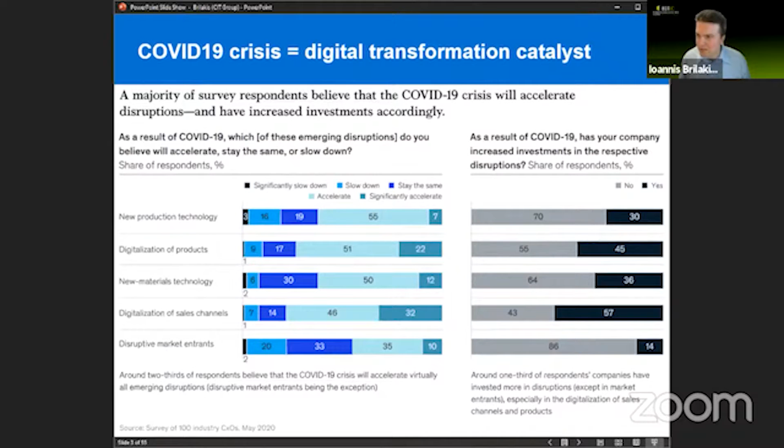On that, digital twins, in my view, are at the core of this digital transformation journey. And I think you've already seen from the presentations before us about what the value is. There's clearly quite a lot of potential value across all KPIs: cost, time, quality, safety, sustainability, resilience, and so on.

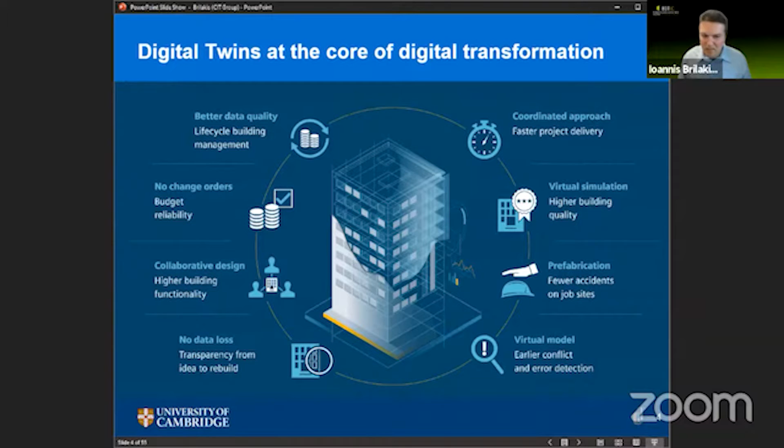But then the key question that comes to my mind is, if digital twins are so great, why aren't they as ubiquitous as physical twins? Why don't we have them everywhere? My tentative answer is these 4 main bullets.

The first one is, we know the physical twin as a product, but we're still discovering the digital twin as a product. And we need a lot more R&D to get to the point where we would have a similar degree of understanding of digital twins as we have of the physical assets, the bridges, the buildings, the roads, and so on.

The second aspect is that, likewise, we know and we have been automating for decades now physical twin processes, design processes, construction, maintenance, and operation processes of the physical twin. But we haven't done that for the digital twin. Ways to design the digital twin, construct the digital twin, the twinning process, maintaining the digital twin, and so on.

That is primarily mostly manual, therefore perceived as very expensive. Therefore, the value to cost, the benefit to cost relationship is just not there in place yet to allow us to penetrate the market quite fast. So again, a very big need for R&D to create more AI and automation to help the twinning process.

The next 2 are more industry related. One has to do with the fact that owners have quite a lot of experience of the value of physical twins, but not of digital twins. And that makes there a very big need for real use cases that can help push for much more rapid market penetration.

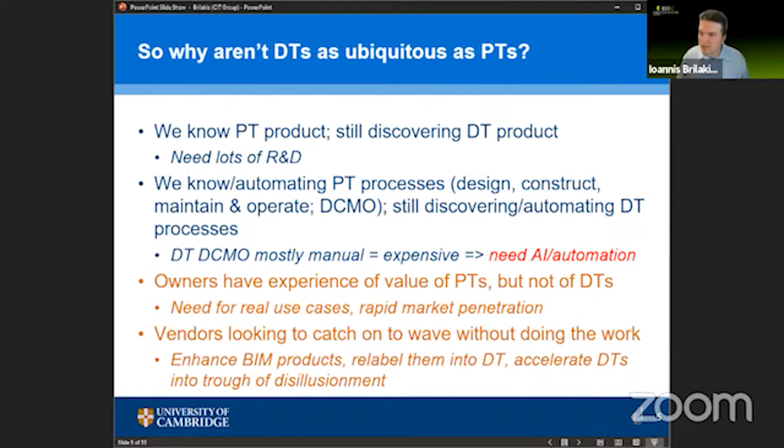So how do we solve this problem? Well, on that space, at least at Cambridge and also with colleagues like Rafael Sacks and others, we're trying to do as much as we can on those first 2 bullets to understand the product and understand the processes necessary so that we can service the market better.

On the first bit, on understanding the product, a year ago, we published a paper with Rafael Sacks where this figure comes from, although this one is slightly adapted since last year, that sort of gives you an overview of the relationship between digital and physical twins.

We like to use here the paradigm of a person standing in front of a lake, the person being the physical twin, and then underneath him, his reflection on the lake is the digital twin. So you see the positive axis going up is the physical product and process, and the negative axis is the information volume.

And so starting from the beginning of time, you have your planning and your design phases from the moment of conception. On the physical end, you have all your design processes going on. And then on the digital end, you have the outcome, which is the design phase, product and process information gradually taking place. This is what we would call the design phase digital twin, or the fetal stage digital twin, before the building is actually born.

At the birth time, that's when prefabrication starts, which means construction processes start, prefabricated parts start happening. And on the other end of the spectrum, on the information end, you have construction phase product and process information starting to materialize. And then continuing on beyond the weaning phase, when the prefab parts leave the mothership and go to the actual site for installation, which is where you would actually grow your child physical twin into an adult.

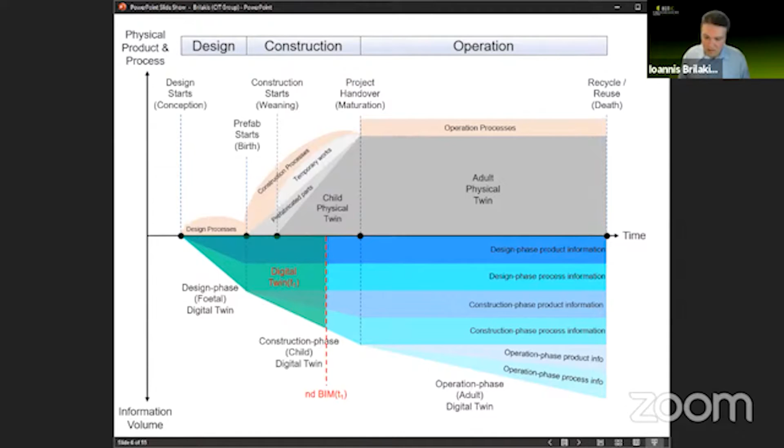Having said that, another important suggestion of my own is that I don't think digital twins should have any data in them. I cannot stress that in stronger terms: data have no place in a digital twin. Information does. Data is just raw data that may or may not have any information value.

It should be there to help us derive the level 1, most basic information level digital twin coming out of structured and unstructured data, typically held separately and deleted after use. Things like point clouds, things like images, none of that should be, in my view, in a model. Again, that would be a very basic digital twin.

As through the examples presented earlier, what we want to achieve is process that information, look at the information patterns, interpolate, and generate knowledge. Then beyond that, take those knowledge patterns, do some simulations, extrapolate, and as a consequence, generate insight. I think that's when we're going to get the best value out of digital twins.

And by the way, to do any of those things, that is actually a perfect use for AI. That's why the journey of digital twins is inseparable from the journey of AI. One helps the other quite well.

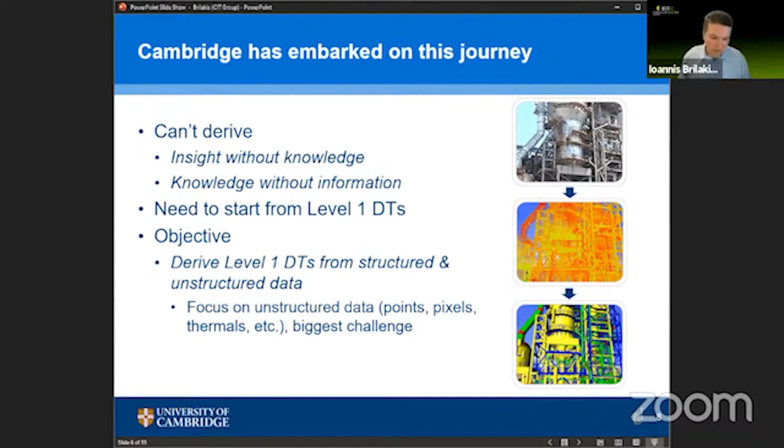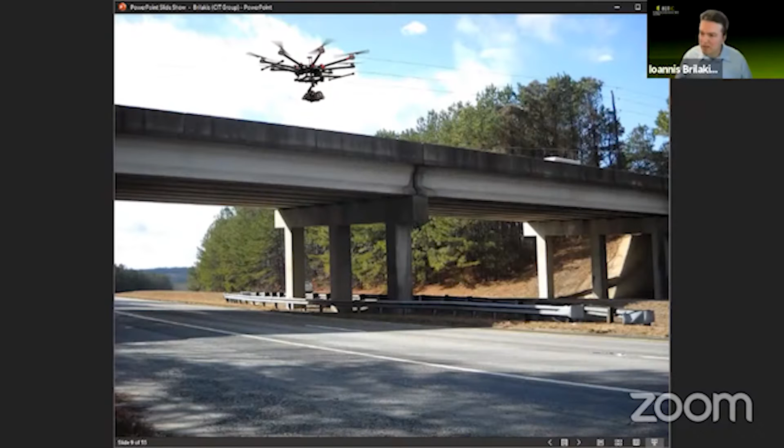On that space, we've done a lot of work using basic things like points and pixels on any asset, a bridge, a building, a road, and then from those points and pixels automatically generating the components, registering the textures on top, and then on those textures trying to derive information such as condition information and other things that might be of use later.

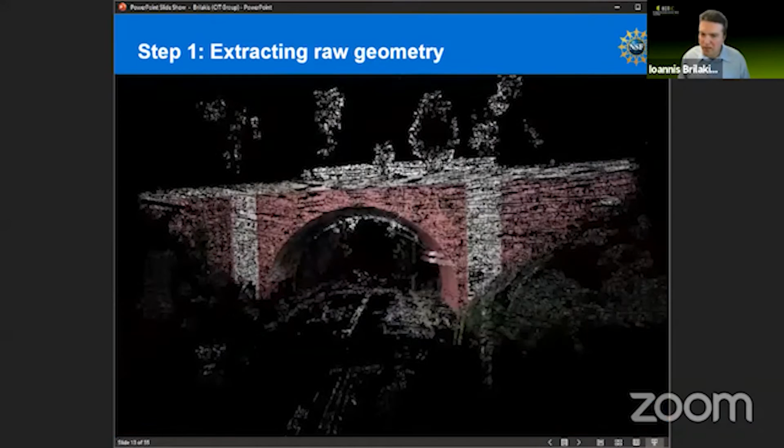To do that, we've come up with multiple methods, such as this one, mid-range mobile videogrammetry, allowing us to extract raw geometry from just a mobile phone from 25 meters away with a sub-centimeter spatial error, taking those point clouds, equalizing the densities, fixing the holes, producing generally good quality data sets that are meant for the machine's eyes to see.

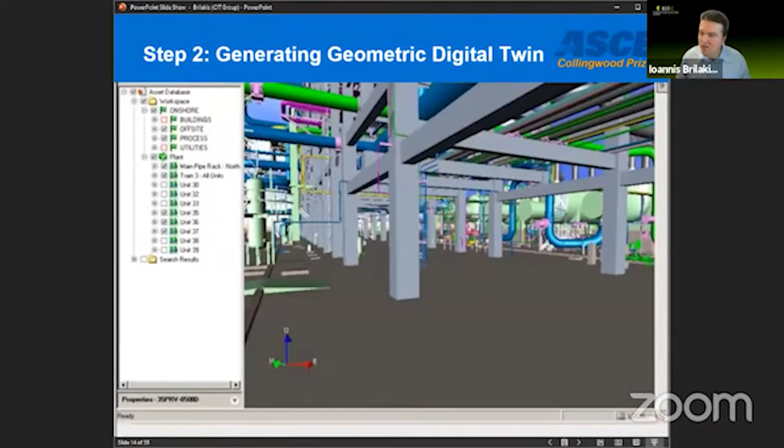I want to make that very clear: this is not for the human's eyes to see, because the main purpose is to process that into this level 1 information stage digital twin. That is a big problem on its own. There's been reports upon reports that talk about for every 1 day of laser scanning, people have to spend 10 days modeling.

That we are working with point clouds with well over 30 billion points in many cases. And most importantly, it's a very boring job. Imagine someone tried to model pipe after pipe, valve after valve. I mean, the example I have here on the right, this reactor building, 40 billion points. It took 10 people 6 months to make one model. I mean, this is clearly a case that screams for automation.

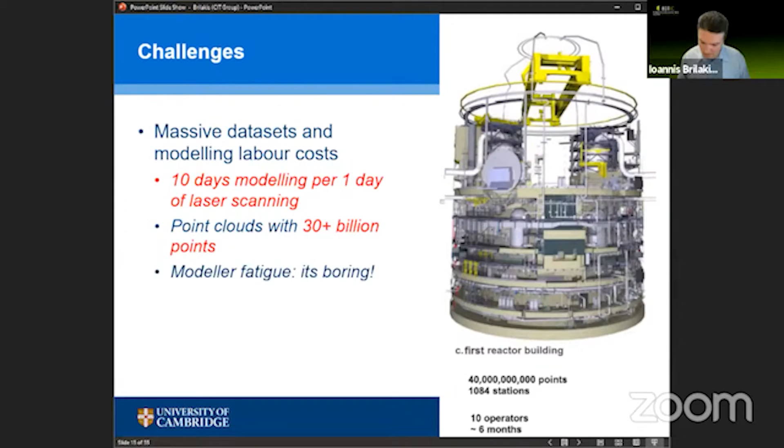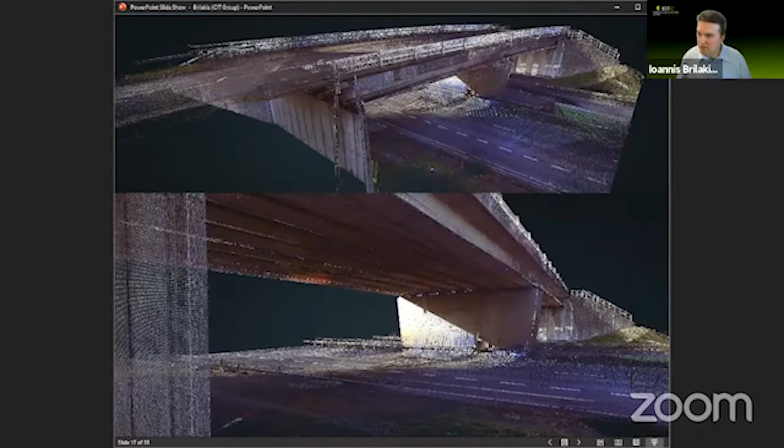In that regard, we've come up with several methods to help us achieve that completely automatically for bridges in the first instance, where everything is exposed and the number of topologies is small, but at the same time capturing the real world skews and peculiarities of every component, going from this stage, the points and the pixels, into the detected components, and then from the detected components into the actual model outcome.

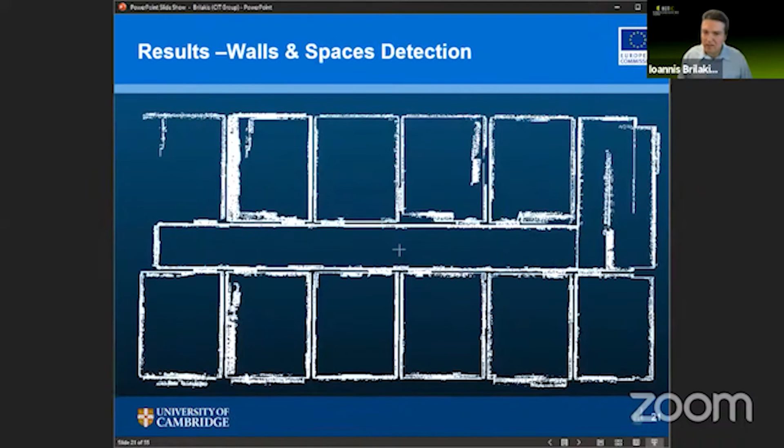And we've done the same for buildings, trying to capture raw data, converting that to usable information, creating the object-oriented model of that process, going from the point cloud into detecting the rooms and the floors, and then from the rooms detecting floors and ceilings in the presence of clutter, detecting the walls, fitting the components, and creating the actual model.

We've recently done the same for industrial facilities together with AVEVA and BP, capturing cylinders, elbows, channels, I-beams, valves, flanges, and so on. A pure deep learning application, which can then be enhanced with contextual information to give us a high quality model at the end of the process.

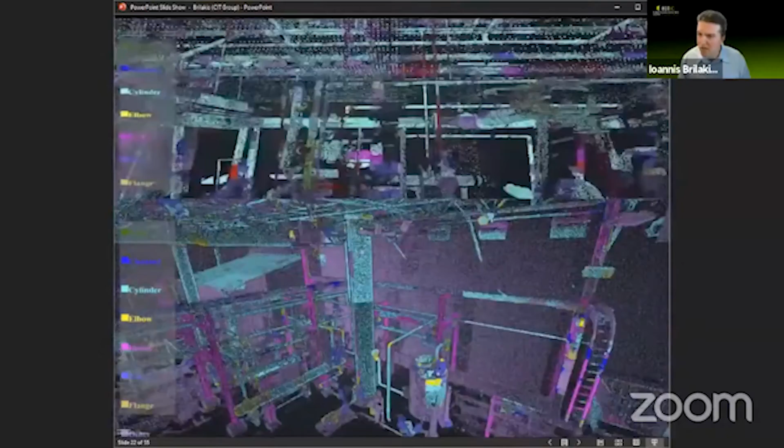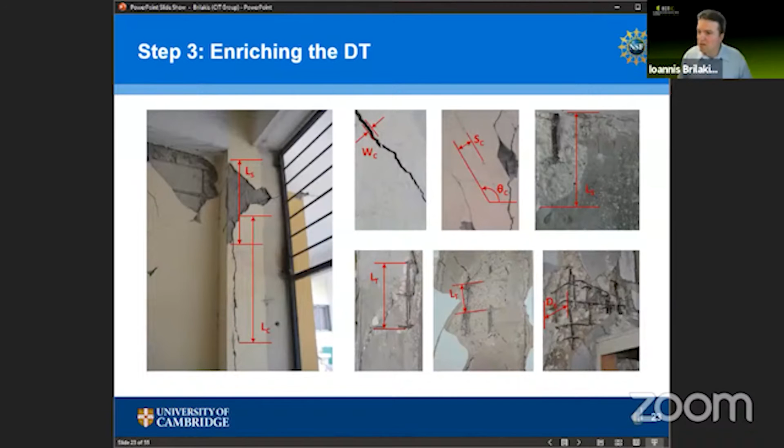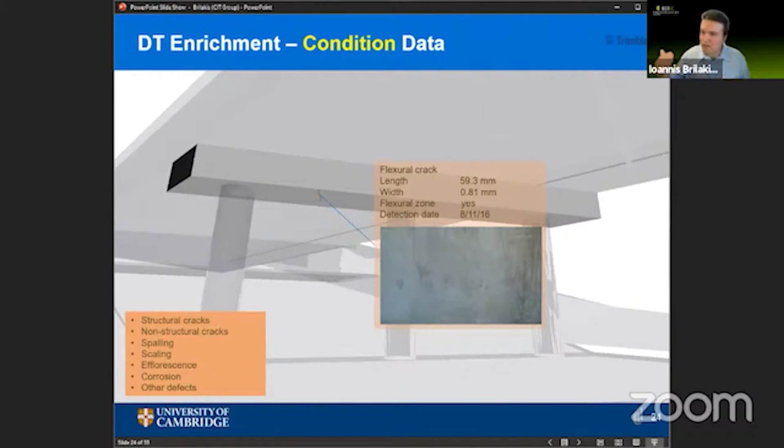Once we've done that, we can then enrich that with additional information coming from the textures, such as condition information, cracks and spalling and patching and other problems. We've done that for bridges already, where we're capturing quite a large number of defects and their properties and putting them back into the model. And we've also done that for roads, where we're able to capture cracks and potholes and patches and rutting and shoving, measuring that information and bringing that back into the digital twin of the asset.

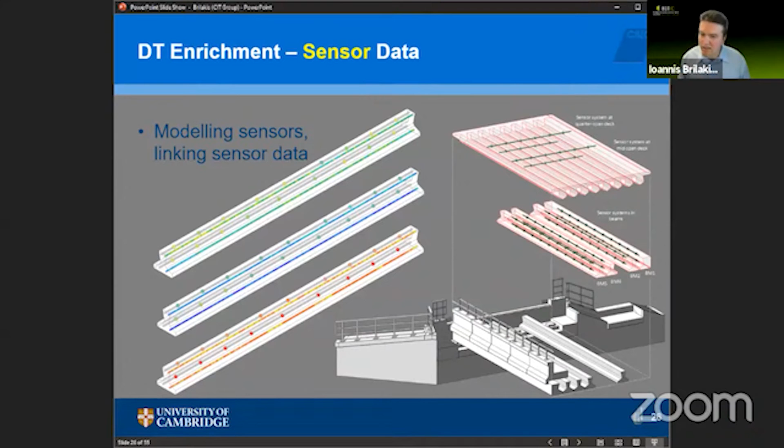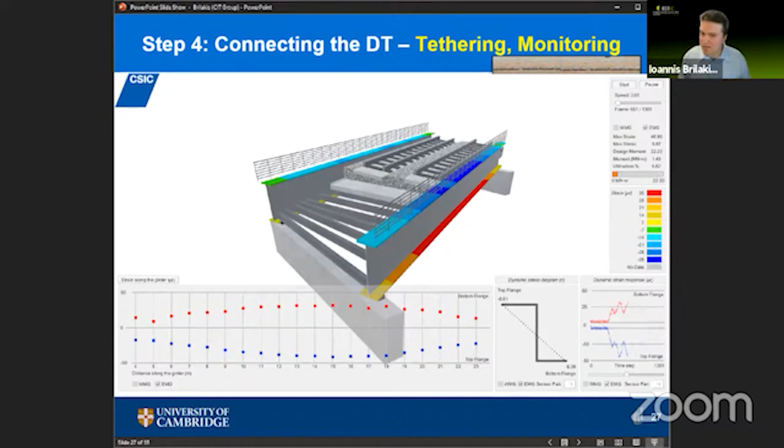We've also brought in sensor data back into the model to create the connection effect that was discussed earlier today, by modeling the sensors on the components and then bringing the time series data for the connection so that we can see exactly what is happening, in this case from a structural perspective, on our asset as our asset is being used.

This is the long-term vision. Basically, how can I achieve real-time monitoring and operation of assets through digital twins, not only at the single asset scale, but at a portfolio of assets and eventually at the system of systems level, like Rafael Sacks was explaining earlier. That's the dream of the National Digital Twin that the Centre for Digital Built Britain has been focusing on.

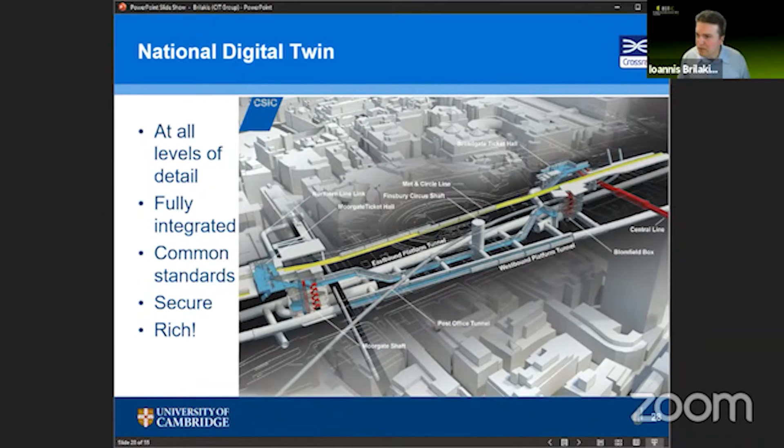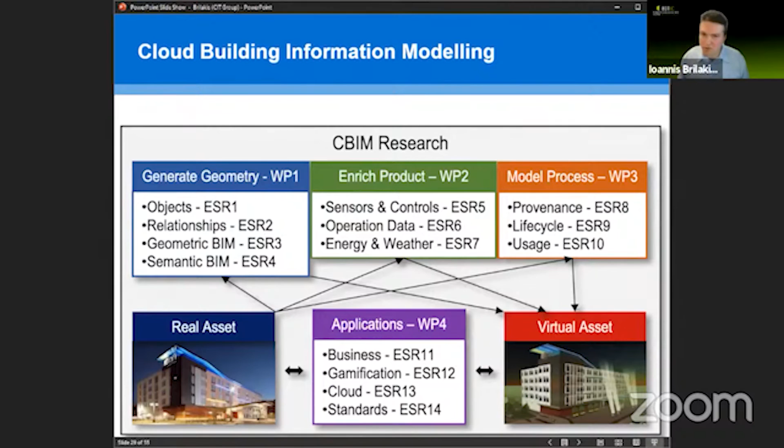On that, we're working on several existing projects, some of which were mentioned already. This one called Cloud Building Information Modeling, that's focused on generating geometry, enriching the product, modeling the processes, and then running applications on top of that. The BIM to Twin that Raphael was explaining earlier, I won't explain that as it was already mentioned before.

And also another one called Omicron, which is focusing on doing similar things to the BIM to Twin project only for roads, going from a road digital twin to decision support tools, to smart construction interventions, back to inspection and back to the twin. So this would be a plan, do, check, act cycle, exactly as Raphael was explaining earlier.

Our long-term vision is that eventually we should get to a point where we are looking at assets as a combination of their digital and physical forms, where in the physical versus digital and product versus process scales, we can then combine smart materials in the physical product, automation and robotics in the physical process, data science under the digital process, and digital twins under the digital product. And in doing so, I think we can run our assets a lot better into the future.

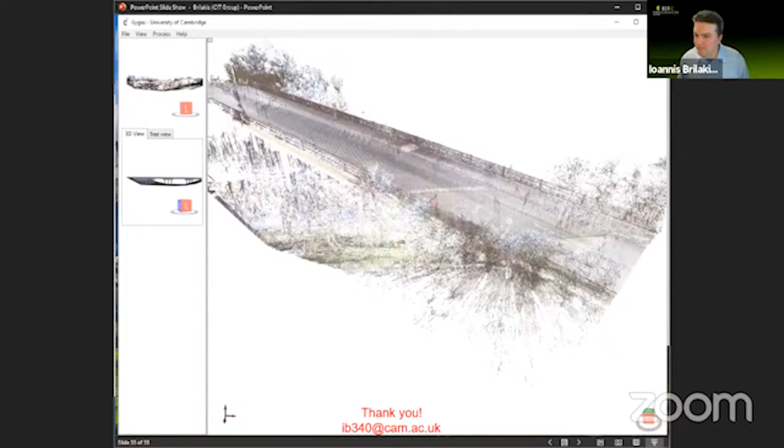Thank you very much, Ioannis. Now I understand the Brexit, and we have to ask for a Spanish seat, something like this, in order to make such kind of work as you are making with the CDBB and the university. I think this is extraordinary.

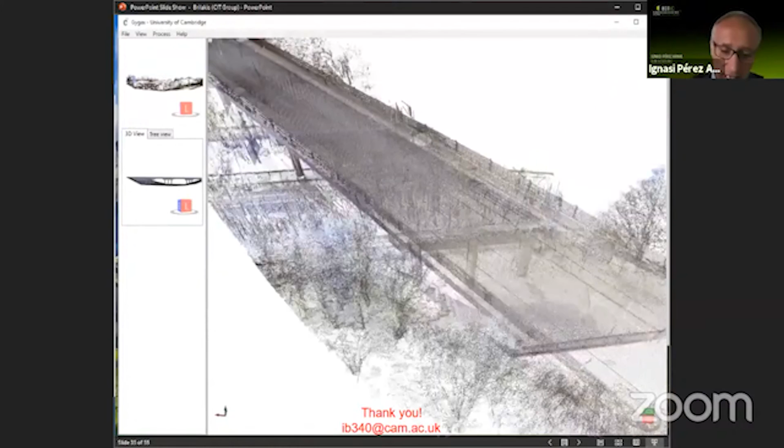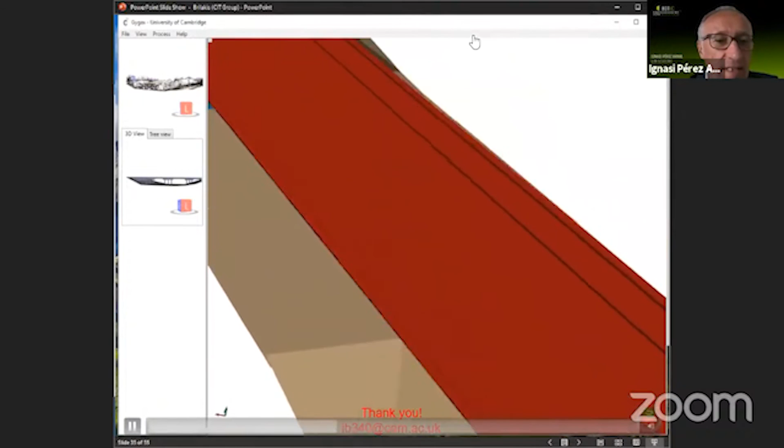And what you show us is something very interesting, because it's not only talking about the building part of the digital twin, but also the infrastructure part of that. And this automation that you are showing us right now is really interesting.

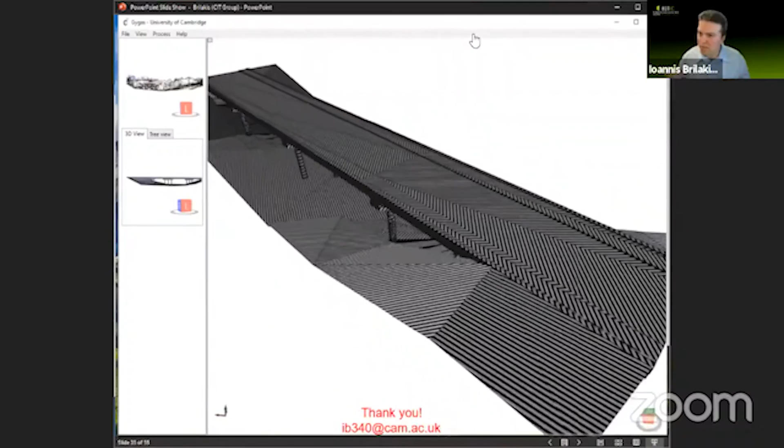This is just an example, by the way. This is part of our software called Gygax. Gygax is available for free on GitHub. Anyone can download, it's open source, and you can try to work on that. It gives you the ability to play with point clouds, with images, with IFCs, with various other data sets, bring them together, and manage to go from data into usable information within this environment.